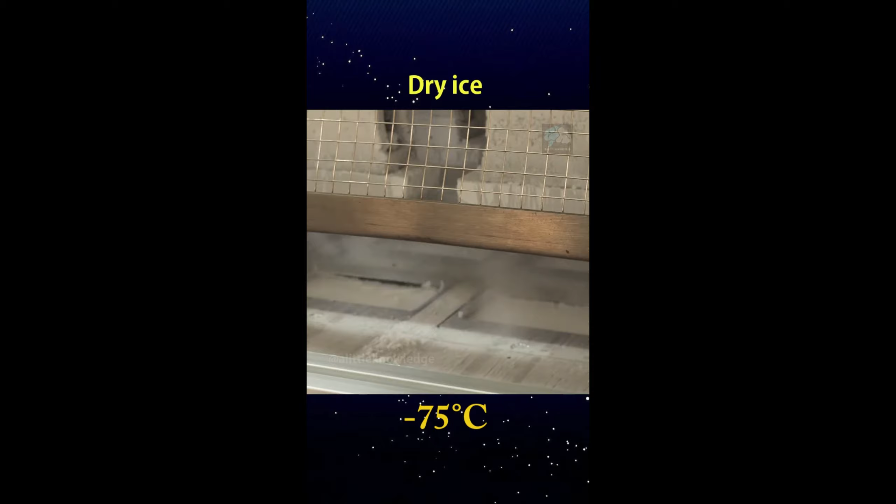At temperatures above this point, at normal pressure, dry ice will directly sublimate into a gas without going through the liquid phase. Therefore, when placed on hot surfaces, dry ice will sublimate rapidly and create an air cushion, which helps lift the block of dry ice, reducing friction with the surface, allowing it to slide easily.

While it can create visually appealing effects, dry ice also poses many dangers. Due to its extremely low temperature, dry ice can cause frostbite and tissue damage.

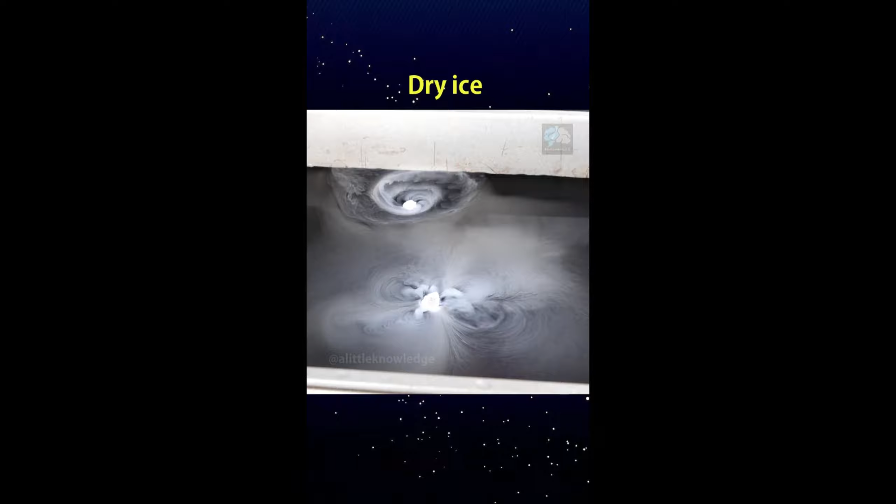The CO2 gas produced can cause asphyxiation, especially when it transitions into the gas phase within a sealed container. Sudden pressure buildup can lead to an explosion.

Accordingly, the tank will be equipped with high sensitivity and wavelength radars. When a threat is detected within the scanning range, the system automatically launches an interception missile.

The missiles are not required to hit accurately; they will explode when they get close to the threat, away from the tank. However, for targets with extremely high speeds or launched at close range, the interception process may occur near the tank, causing damage to both the tank and the accompanying infantry.

Instead of using fire to handle the remains, a new method is gradually being adopted, known as aquamation or water cremation. With this method, the body of the deceased is immersed for 3 to 4 hours in a mixture of

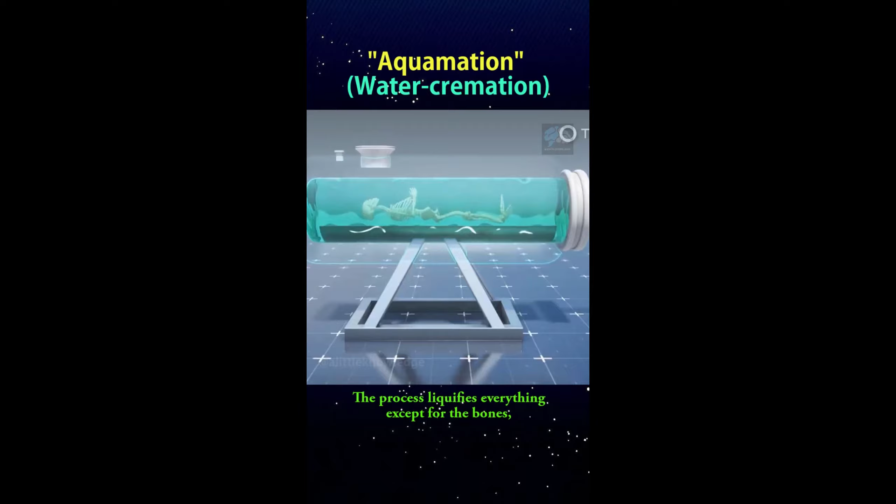water and a strong alkali, such as potassium hydroxide, in a pressurized metal cylinder and heated to around 150 degrees Celsius. The process liquefies everything except for the bones, which are then dried in an oven and reduced to white

dust, placed in an urn, and given to relatives. The wastewater is sent to processing plants and then released into the environment.

Especially, this method doesn't vaporize mercury found in dental fillings. The mercury is collected and later treated to prevent its release into the environment. Currently, aquamation is not only used for humans but also widely adopted for handling the remains of pets.

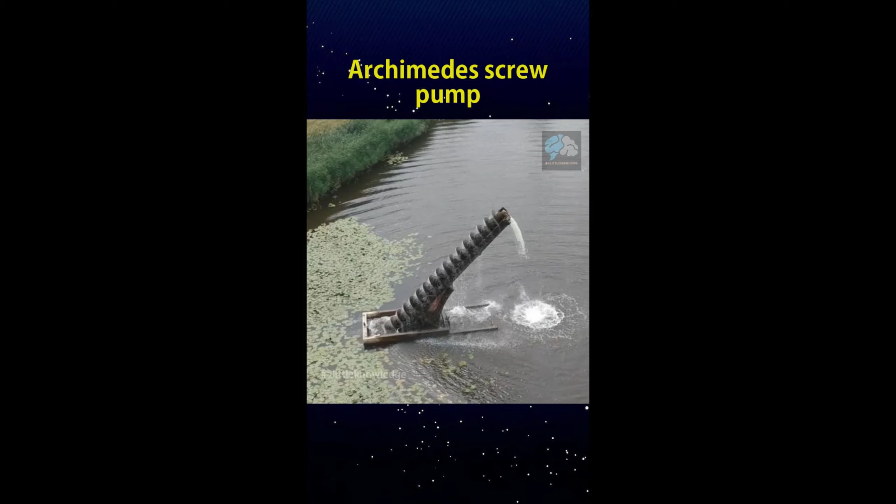This is considered the world's first pump, the Archimedes screw pump. The pump consists of a spiral groove that rotates around a cylindrical axis inside a pipe. When the screw rotates, water is lifted up along the spiral.

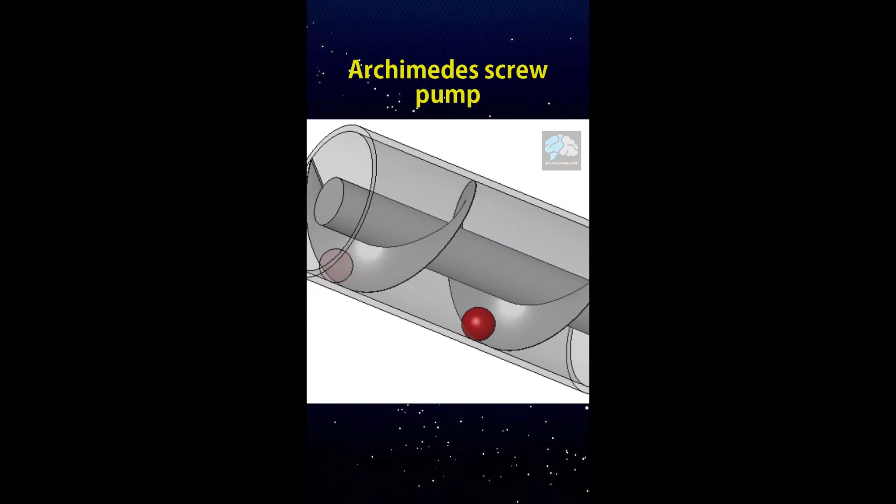The contact surface between the screw and the pipe does not need to be tightly sealed. It is only necessary to pump more water in each cycle than the amount of water leaking out. If water flows from a higher section to a lower section, it will be lifted up again in the next

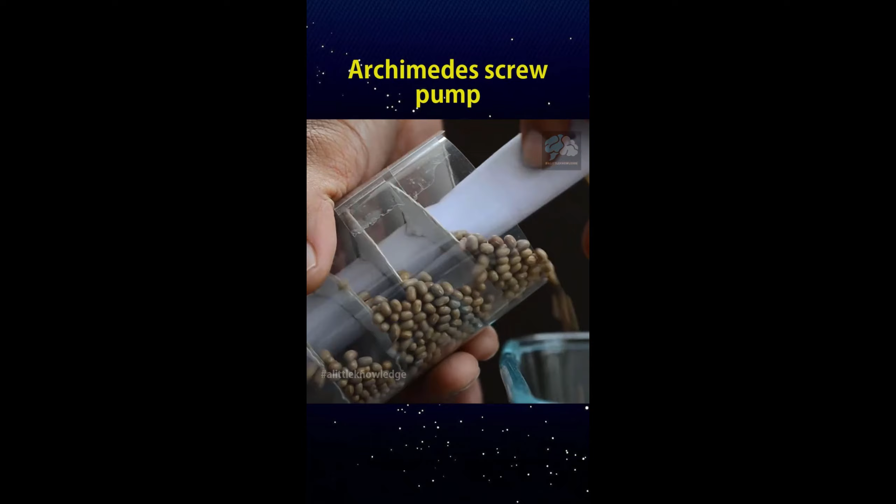rotation. Over time, the application scope of the screw pump has expanded. It has the ability to transport solid materials such as grains or sand. If water flows backward from top to bottom, it will cause the Archimedes screw to rotate, allowing the central shaft

to operate a power generator. Based on this principle, in 2017, the world's first reverse Archimedes screw hydroelectric plant was built in the United States.

the lack of oxygen, it hasn't ignited immediately. When someone breaks through a wall or simply opens a door to fight the fire, a new stream of air rushes in, supplying oxygen to the fire.

At this moment, the fire is reactivated and erupts violently, with the sudden expansion of air leading to a pressure wave accompanied by a burst of flames outward. The backdraft phenomenon can occur easily because in certain emergency situations, it can be challenging to observe and accurately predict.

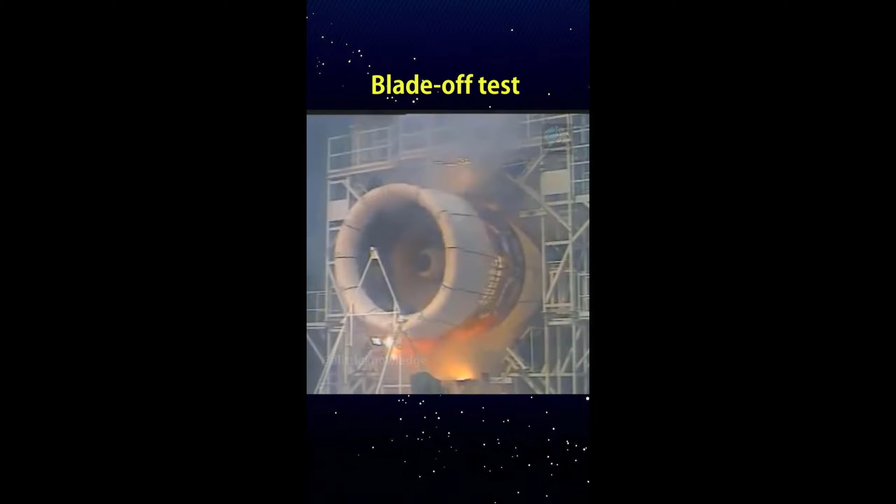This explosion is a successful aircraft engine test, called a blade-off test, which is costly and time-consuming. The test does not require the engine to continue running after the fan blade is broken, but it must ensure

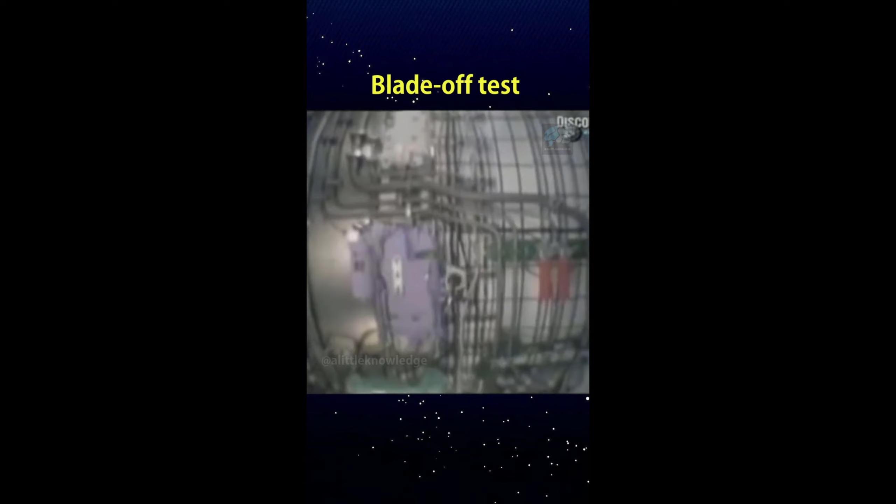that the engine's casing contains the debris inside to prevent it from puncturing the cabin or fuel tank. Fan blade damage can occur due to metal fatigue, internal engine components not being uniform, or external factors such as collisions with birds.

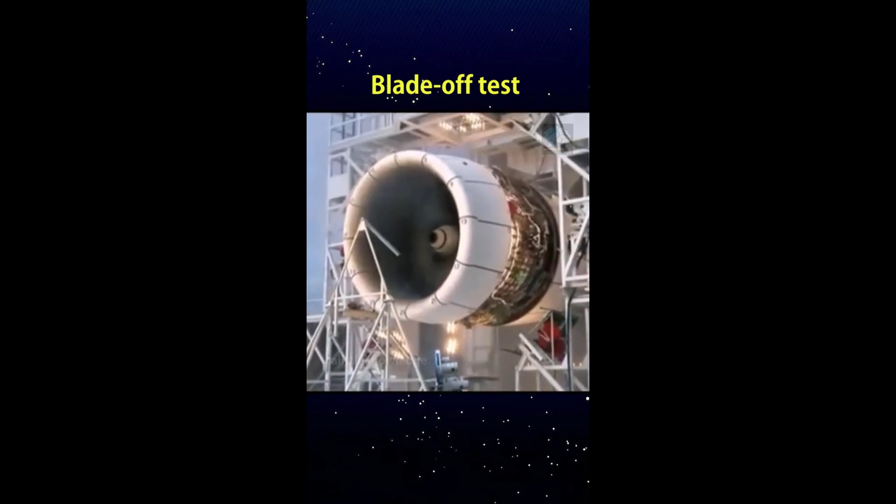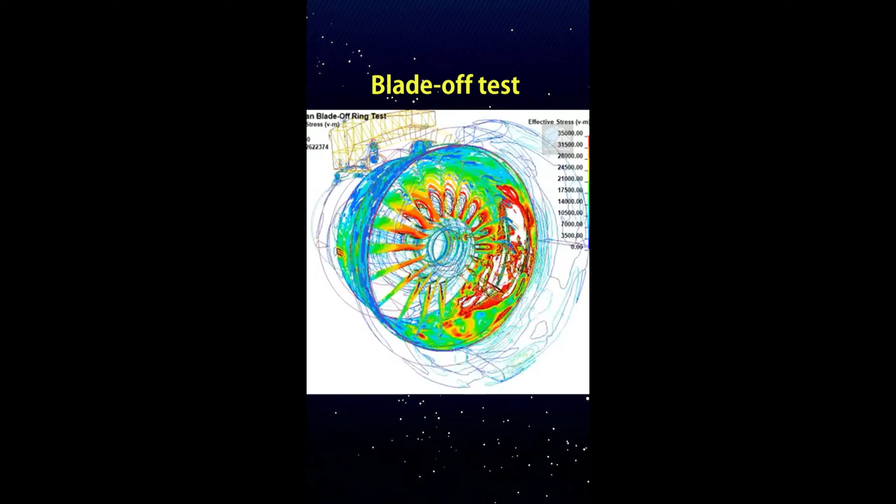To conduct the test, a small amount of explosive is placed behind a fan blade. When the engine is running at high speed, the explosive will be detonated, causing the fan blade to break off and impact the internal components. Passing this test requires the manufacturer to carefully calculate the structure of the casing to ensure protection while maintaining an appropriate weight.

This is the lamp that is illuminated by calcium carbide, something we have heard of in chemistry class. Its name is carbide lamp. Its structure consists of a water compartment above and a compartment containing calcium carbide below. With the help of a small valve, we can adjust the water flow drop by drop into the lower compartment. At that point, the reaction will produce acetylene gas and calcium hydroxide. The gas released will be ignited and burn easily in the air.

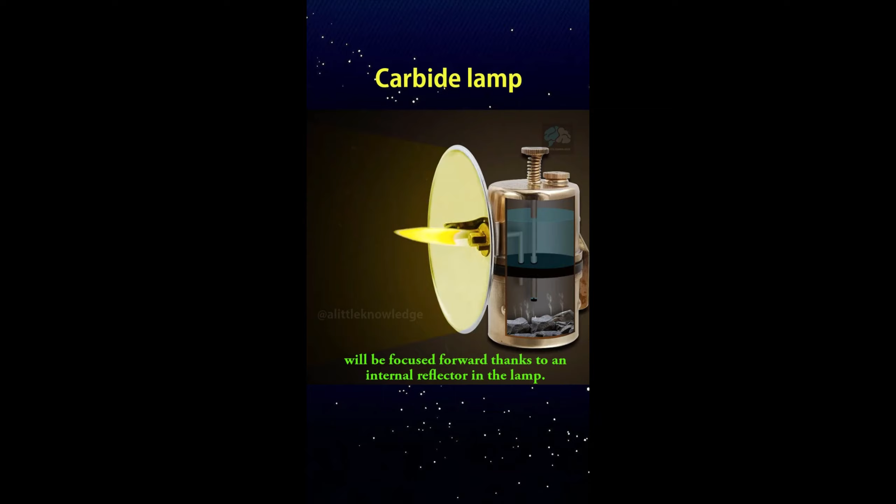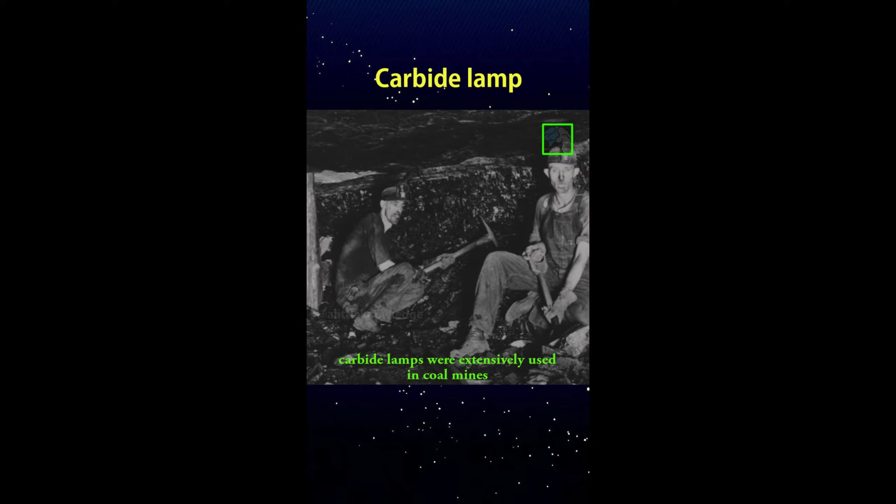The light produced during the combustion process will be focused forward, thanks to an internal reflector in the lamp. In the 20th century, this type of lamp was widely used in Europe for indoor lighting, as signal lights for lighthouses, as headlights for cars and bicycles, and even though it could produce a flame that could ignite methane gas in mines, carbide lamps were extensively used in coal mines until they were replaced by electric lamps.

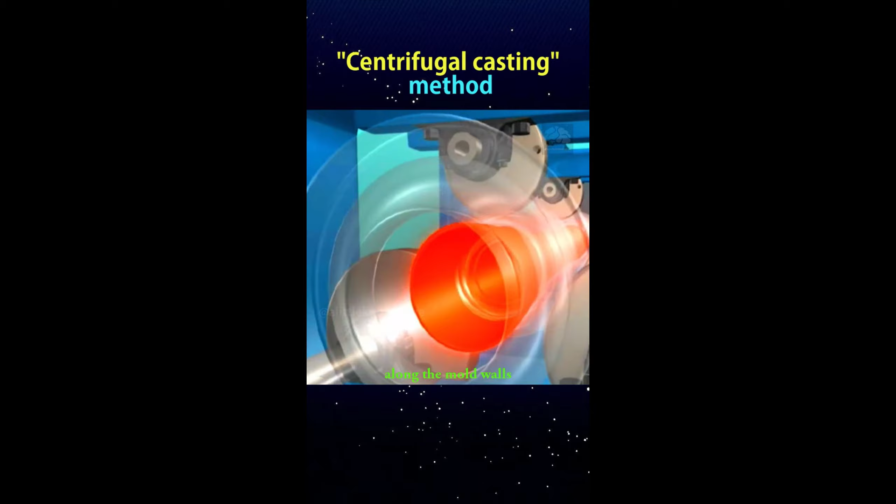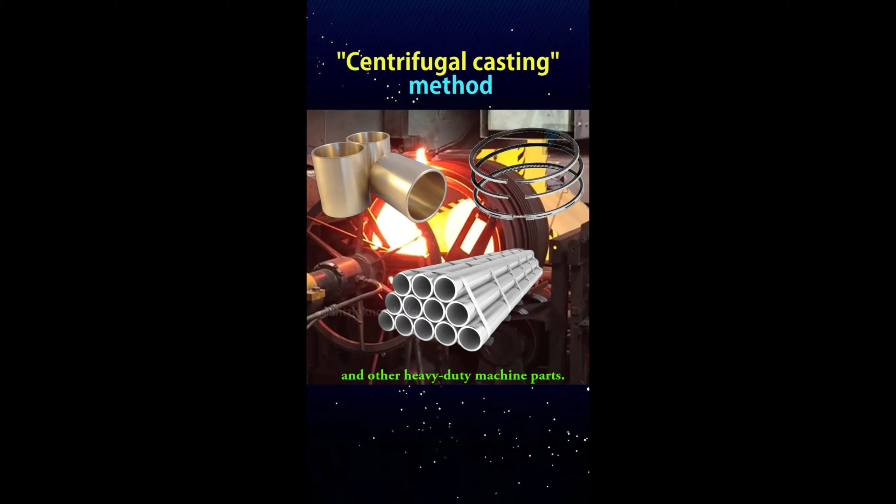This method allows the fabrication of very thin castings, with a smooth outer surface, less pitting, less metal loss, and low labor costs. However, one drawback is that it can be challenging to achieve precise diameters during the casting process. Additionally, the quality of the inner surface of the casting may not be high, often containing impurities.

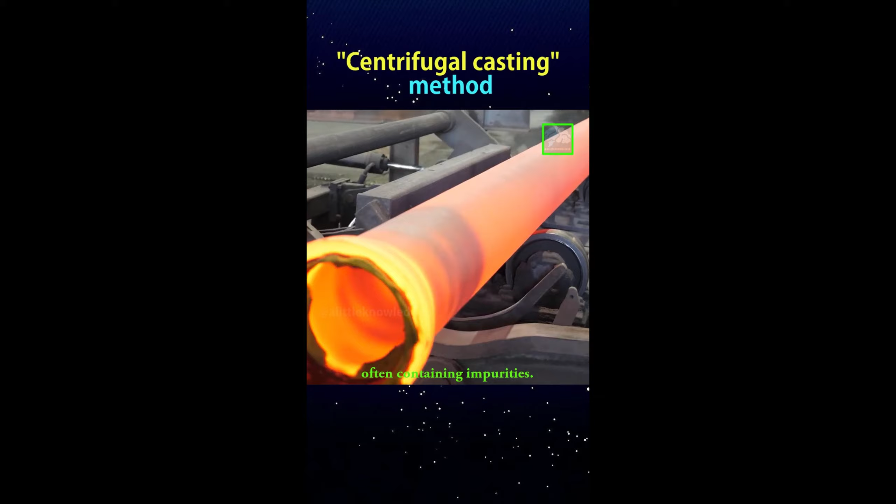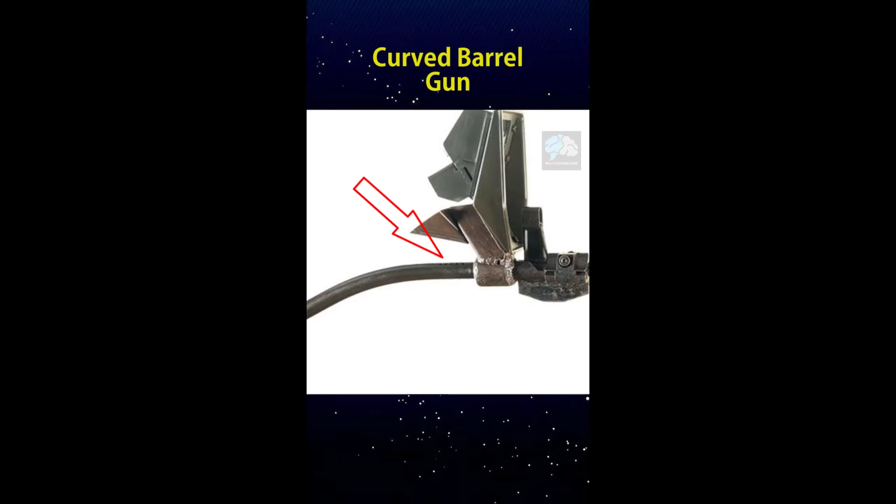In many cases, the bullets could break apart before leaving the barrel. The long and curved barrel also made it more difficult to control recoil when firing. Small vent holes were added to the barrel to address these issues, but they did not provide a high level of effectiveness. Due to technological limitations and the short lifespan and limited usefulness of this accessory, it was quickly phased out.

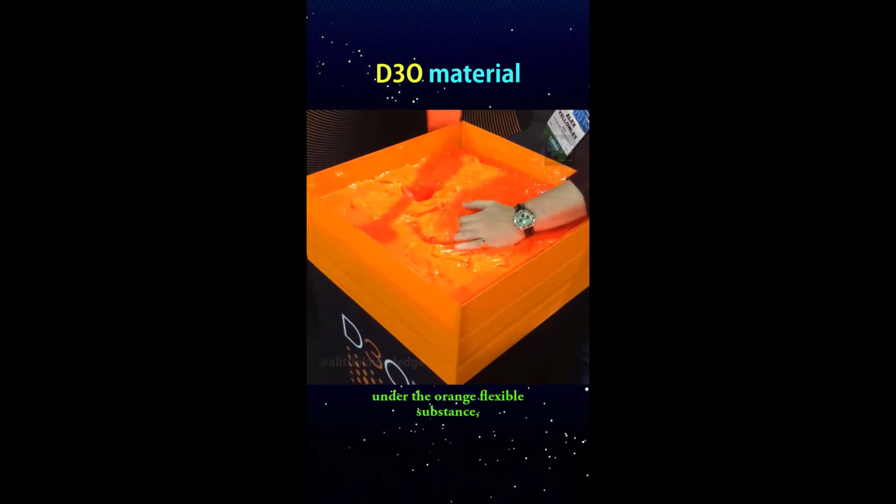When placing a hand under the orange flexible substance, the man can use a hammer to strike his hand without any issues. This is a super impact absorbing material, particularly useful in injury prevention, known as D3O. This material exhibits non-Newtonian fluid properties. Under normal conditions, it is very soft and pliable due to slow-moving molecules. However, when subjected to force, its molecules bind together, becoming rigid and distributing the applied force over a larger area. Thanks to its super impact absorbing characteristics, this material can be applied in various ways, such as producing protective clothing and safeguarding fragile objects.

A quick blow that made the duck not have time to react. The speed is so rapid that it's challenging for us to recognize the culprit as a bird. This is the Peregrine falcon, also known as the great falcon, a species hailed as the feathered fighter. If the fastest species on land is the cheetah, clocking in at 120 km per hour, the sky's champion is the large falcon with a speed that can reach 320 km per hour.

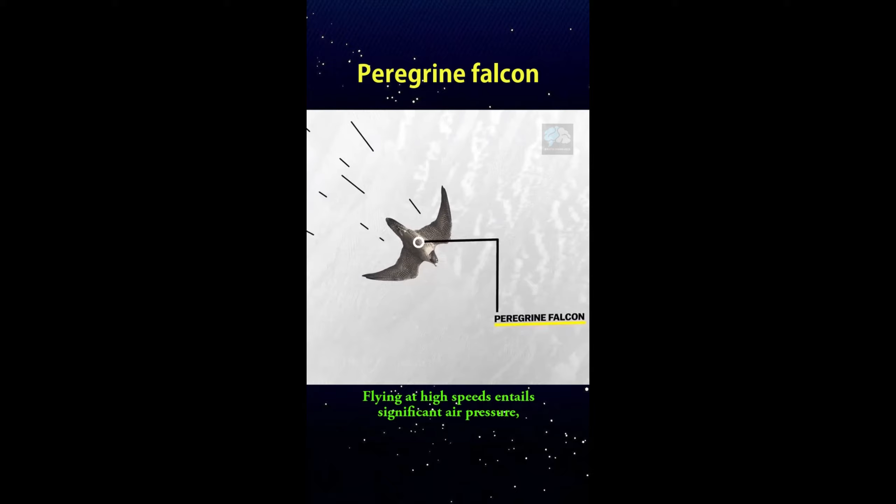When hunting, they grip their talons like a fist. The super-fast speed, combined with this fist, generates a potent punch capable of rendering the prey unconscious. Flying at high speeds entails significant air pressure, and large falcons adapt to this through small partitions inside their nostrils that help slow the airflow rate entering the lungs. It's unsurprising that the B-2 Spirit, the iconic American bomber, was designed to emulate this bird.